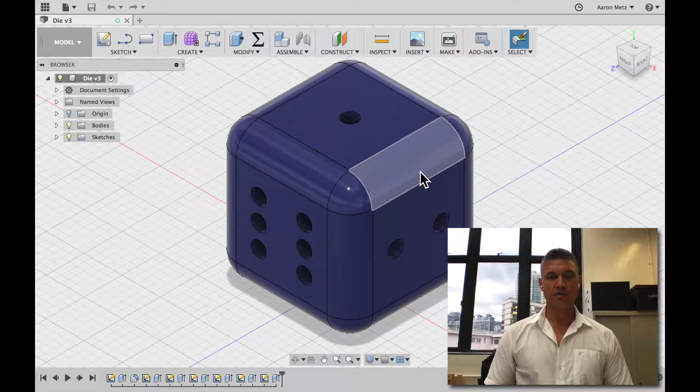Welcome to a tutorial on Fusion 360. In this particular tutorial, we're going to look at how to model a simple dice that you would use for a board game project. You can see on the screen I have the completed model, and I'm orbiting around using the shift and middle mouse button. So let's dive in and look at how to create this.

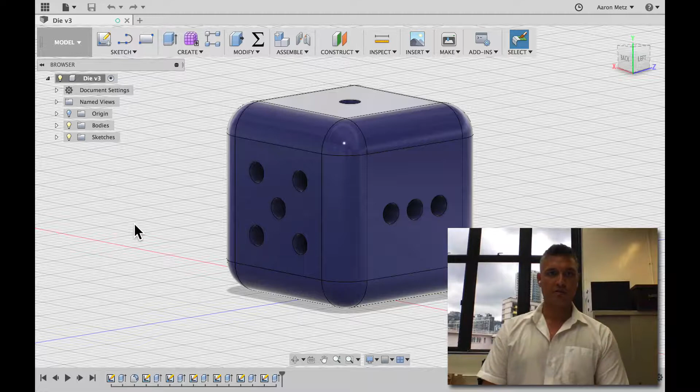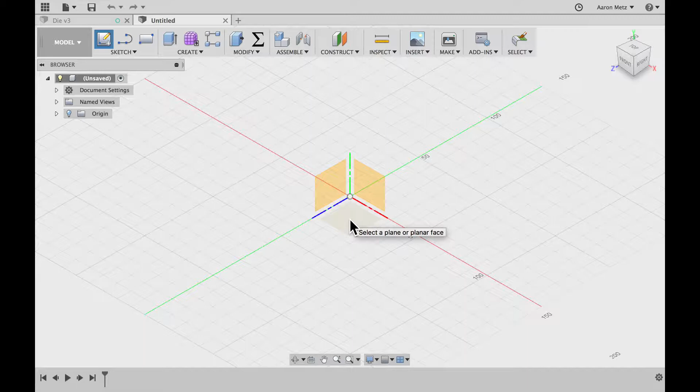I'm going to create a new design, and the very first thing you want to do is create a sketch. When you click Create Sketch in Fusion 360, the first thing Fusion wants to know is what coordinate plane you want to draw the sketch on. For this example, we want to draw it on the bottom plane. Once you have selected the plane, you can then use some of the sketch tools.

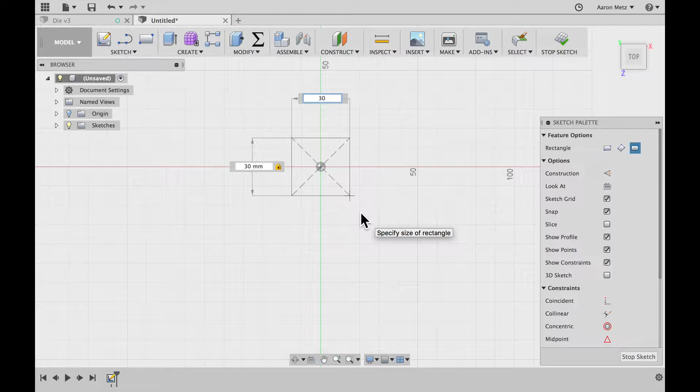So we're going to start with a simple center rectangle. Click the center or the origin and pull out. At this stage, you can enter in the dimensions straight away, which I'm going to do. So I'll just type 30, press the tab key, 30, to give me a perfect square, and then press enter. You can see there's dimension 30 and 30, and also we have the sketch here in the center.

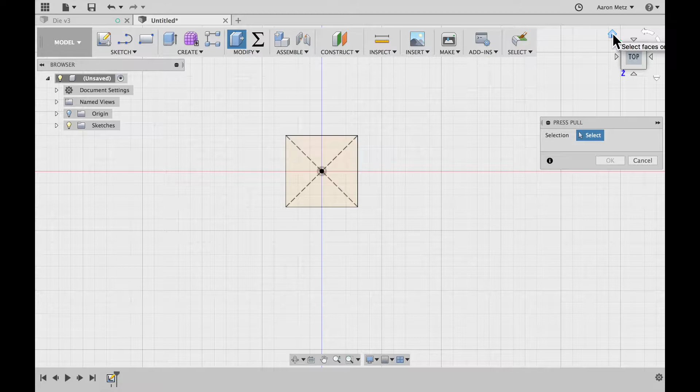But how about transforming this 2D sketch into 3D? Well, we can use the push-pull command, and the shortcut for that is the letter Q. When I press Q, you'll see that the push-pull menu appears. Now I'm going to switch my view with the view cube to home so that I can get a better perspective of the sketch. Then I'm going to touch the face of the sketch to let Fusion know that is the face I want to extrude or make 3D.

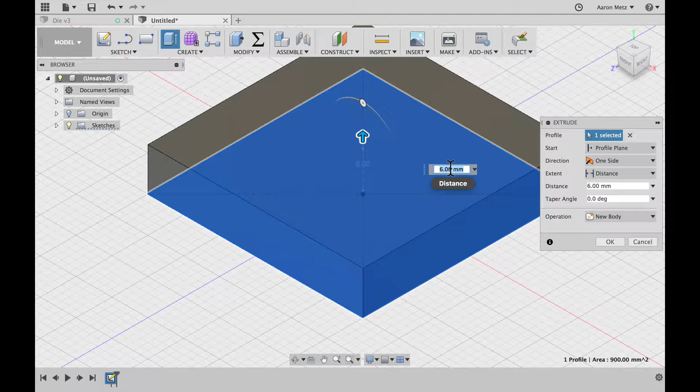You can grab the arrow and start pulling it up, or you can be more precise, which is what we always want to do, and type in the specific measurement. I'm typing 30 so that we have a perfect cube.

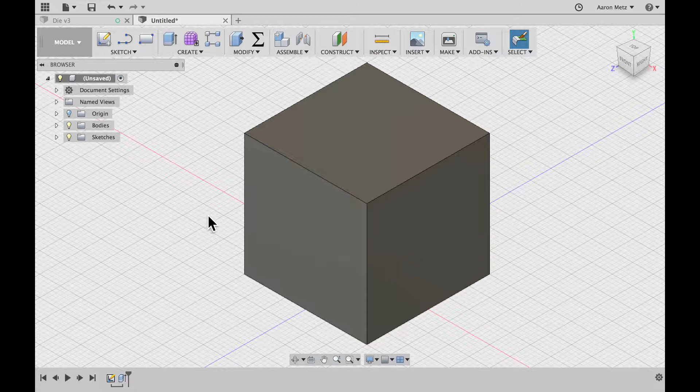Now we are going to create these rounded edges on the cube, and in product design that's called adding fillets. You can quickly add fillets by using the shortcut F, but you can also use the push-pull command to create fillets. So I'm going to press Q again to activate push-pull, and then tell Fusion which edges of this object I want to add fillets to.

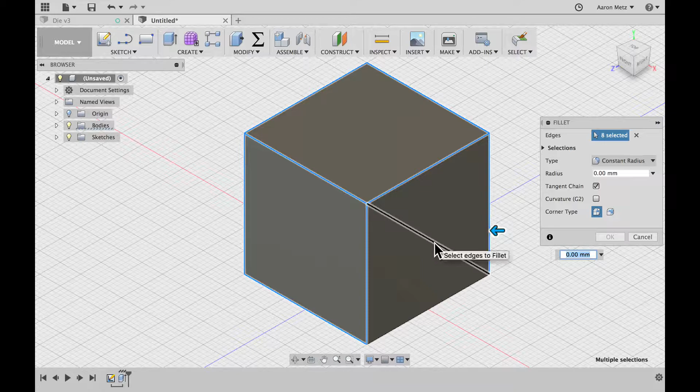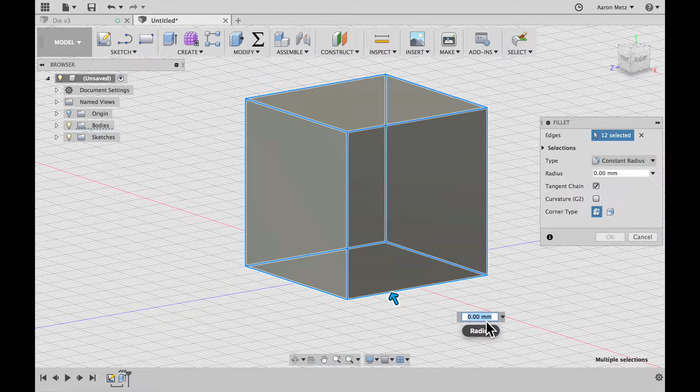And you can see, like a ghost, you can see through this face to the other edge. Or you could simply rotate around so that you can grab the other edges. You'll know they are selected when they change from black to blue. So here I have all of my edges selected, and now Fusion is waiting for me to add a fillet radius. I'm going to use 5 and press enter. And there we have a cube with filleted corners or edges.

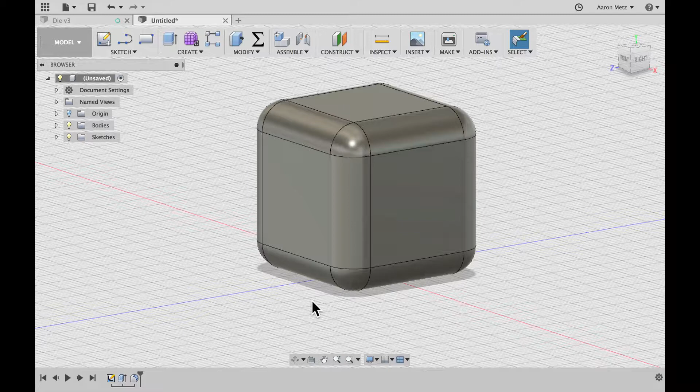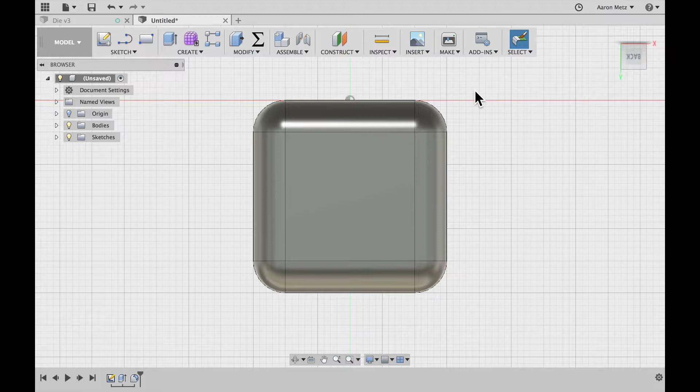So how about adding the numbers to the die? We're just going to simply use circles. We're going to go back to the home view and then the front view, and I'm going to use this view cube every time I need to add numbers to a different side of the die. It's a very useful tool to make sure you are selecting the correct face to draw the circles on. So I'm going to begin with the front face.

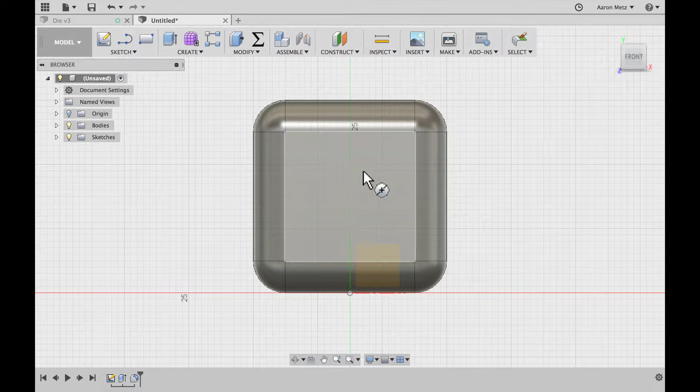I'll go up here to the sketch tools and choose circle, a center diameter circle. Note that the shortcut key is C. Press circle, and once you press the sketch tool again, you need to tell Fusion what part of the model you want to sketch on.

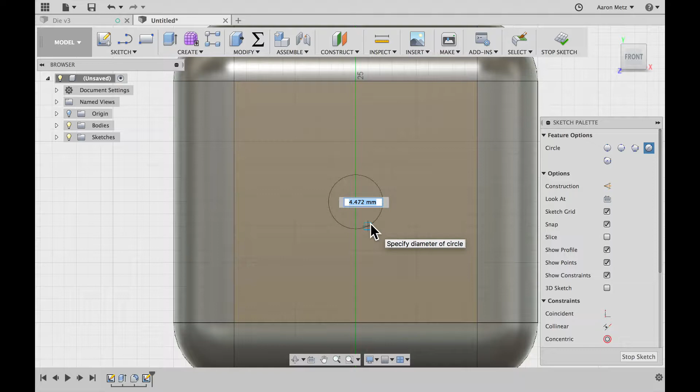In this case, I'm going to select the middle face. I'm then going to zoom in, find the approximate center, click, and drag out a circle. Now before I click again, Fusion will wait for me to input a diameter measurement for the circle. So I'm going to do that by typing in 5 and pressing enter twice.

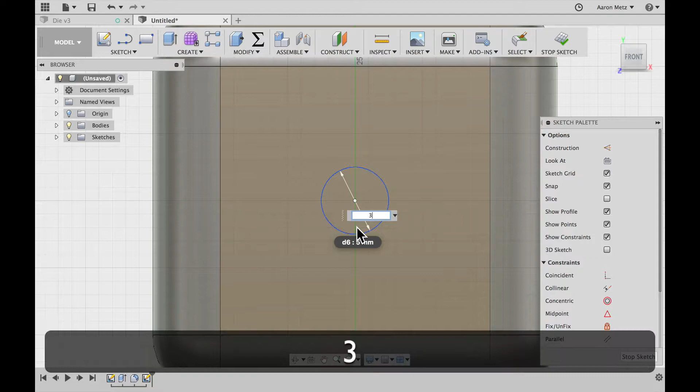Now you see I have a circle. It is 5 millimeters in diameter. And if you want to change the diameter, it's very simple. You can just double click on the measurement and perhaps you want to change that to 3. And I quite like 3, so I'm going to keep it there.

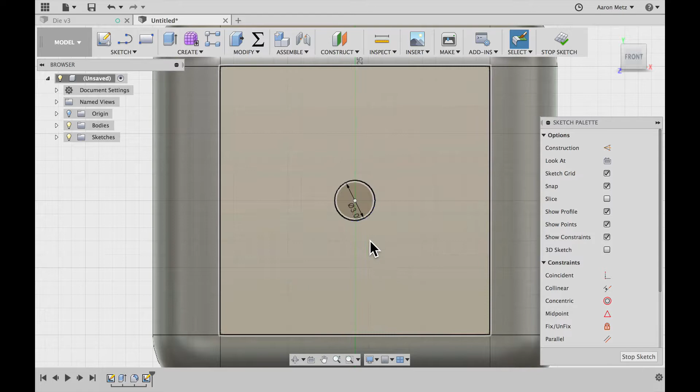And we now want to give the circle some depth. And so we're going to extrude, but this time we're going to extrude inside. So that would be a negative extrusion. So again, I'll press the keyboard shortcut Q for push-pull. I'm just going to orbit the model slightly so you can see how that works.

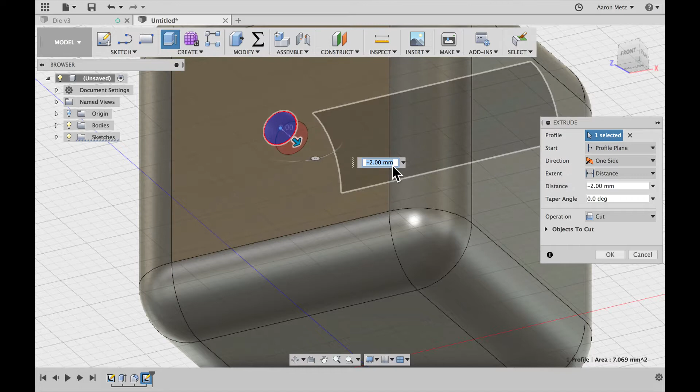Select the circle, and I could bring the arrow the opposite direction. You'll see the values are changing, and I actually like 2. That looks good to me. So I'm just going to press enter. And now we have the first number on our die. Now how about adding the others?

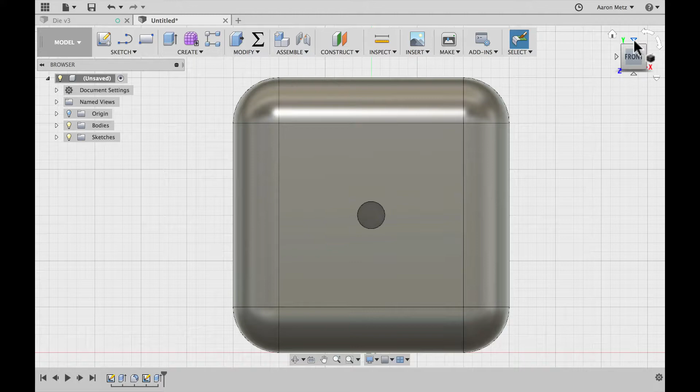What I strongly recommend is, again, you use the view cube to rotate around the different parts of the model. So I'm now going to flip this over, and on this face I'm going to press the letter C, touch the face, and I'm going to create 2 circles to represent the number 2. So each of these will be 3 millimeters.

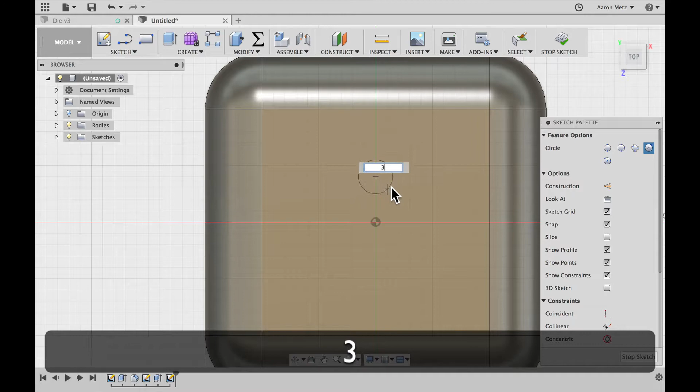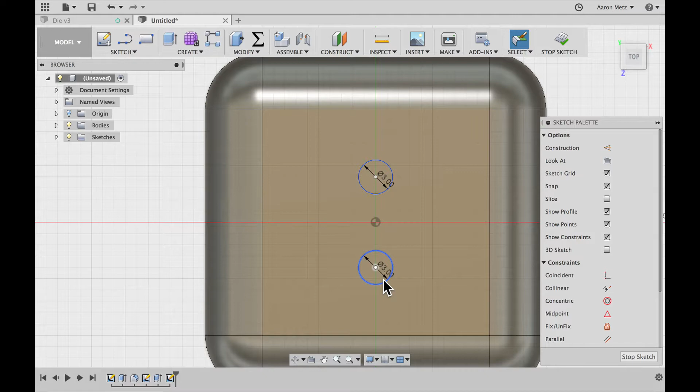So enter twice, press C again, and I can use the grid as a reference. You can see here 1, 2, 3, 4. There's about 4 squares away, and then I'll start to create the next circle. Let's extrude those. Press the letter Q, and just slightly orbit, touch both those faces, and this time I'll just input -2, press enter. And there you have it, number 2.

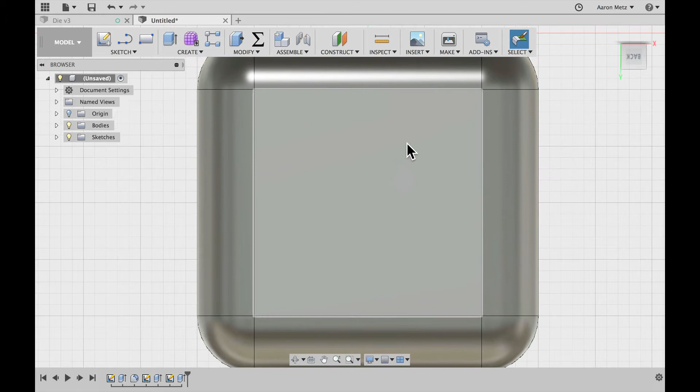The process is going to repeat. I'll flip over the die, press the letter C for circle, and then add 1 into the center. That's 3. And then press C again to add more. C again. 3. Okay, now this is a good example where we can see how we might have to move one of these sketches because they're not

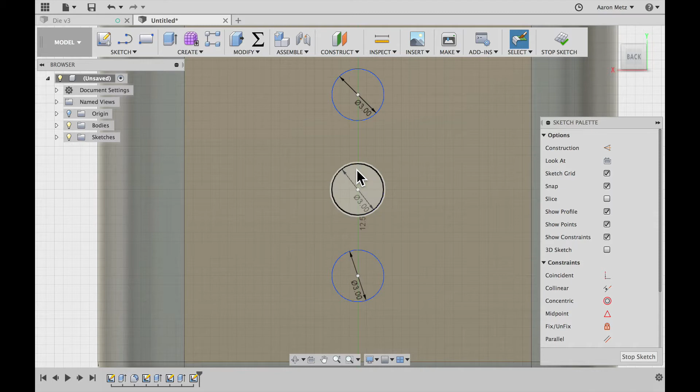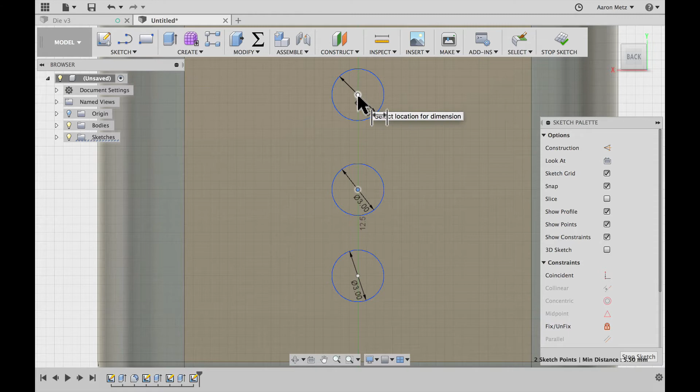equidistant from one another. So actually a really good way to control distances of parts of your models is to use the dimension tool, and the shortcut is the letter D. So if I press the letter D, I'm going to say that from the midpoint of this circle to this circle, and then pull out, I want that distance to be 5. And then again with the letter D, the midpoint of this circle to this circle, again I want the distance to be 5.

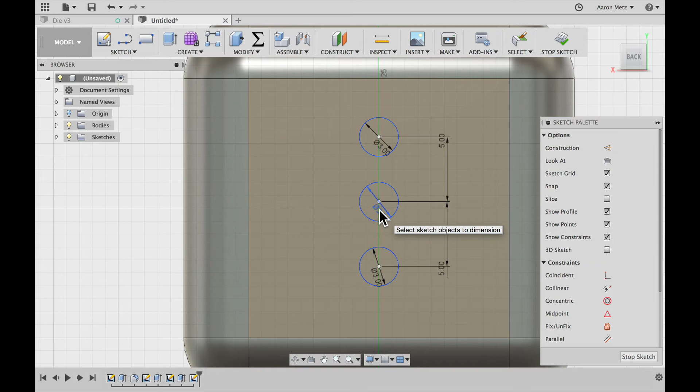Okay, and I'm going to extrude those now, or I might have to shift them all down slightly. I can do that with the move tool. So I noticed that this is not quite centered. So I press M for move and select the objects I want to move. Then the direction, so I'm going to move down vertically, click the direction, and then I'm going to just move them down like that, press OK.